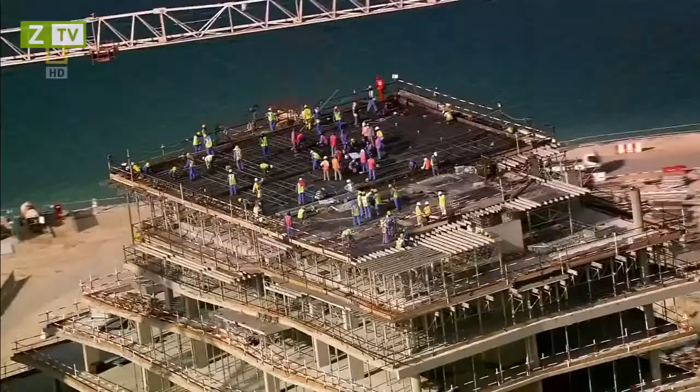Abu Dhabi, the richest city on the planet. It wants to join the City Super League and is undertaking an incredible transformation, building this extraordinary skyscraper, Aldar HQ. Nothing like it has ever been attempted. It'll be a race against the clock. Will this megastructure push even Abu Dhabi to the limit?

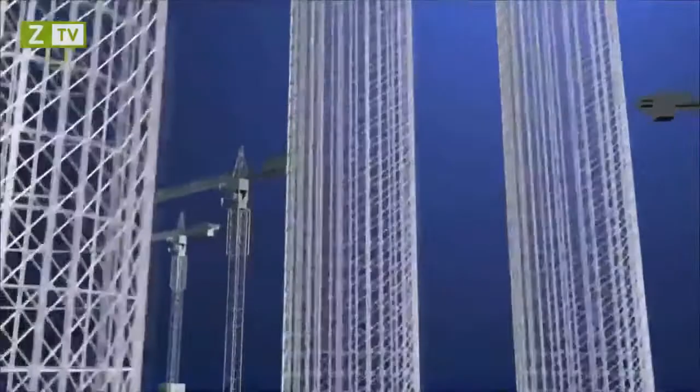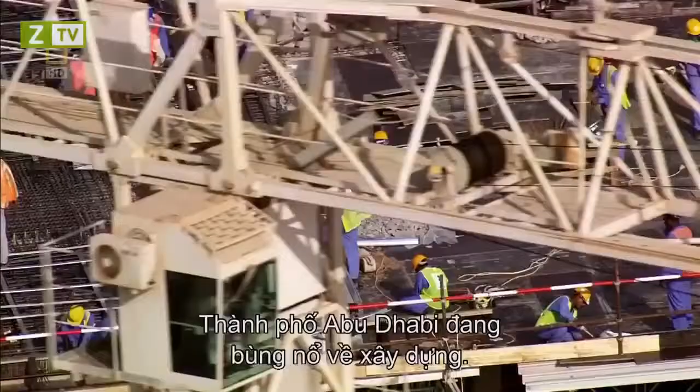Abu Dhabi is in the midst of a construction boom. It's the largest of 7 sheikhdoms known as the United Arab Emirates. Its capital, also called Abu Dhabi, is the richest city on earth. Its ruler, Sheikh Khalifa, has a cool $875 billion in the bank and an audacious spending strategy to match. He wants to transform the skyline and compete with the international elite of London, New York and Hong Kong.

But this is not the first time the Emirate has stood at the crossroads. Just decades ago, Abu Dhabi was a desert backwater, until the discovery of oil in 1958 brought unimaginable riches to its ruler, Sheikh Zayed. As the petrodollars flowed in, he converted the shell houses into high-rise, and the traditional way of life was swept away.

Today, Abu Dhabi is a thriving metropolis, sitting atop the world's 5th largest oil reserve. But black gold alone cannot put this city in the Super League. To do that, Sheikh Khalifa must lure big business and tourist dollars. Abu Dhabi must expand to thrive.

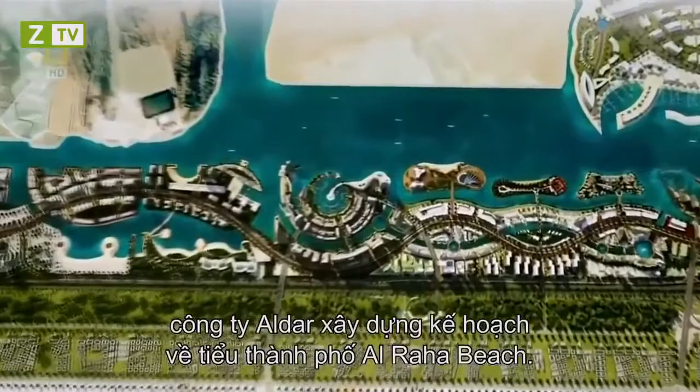To put Abu Dhabi on the world map, fledgling property developers Aldar plan a whole new micro-city, Al Raha Beach. It's an ambitious proposal. At 11 kilometers long and almost a kilometer wide, this city on the sea will be the biggest project ever attempted in Abu Dhabi's history. Mohammed Al Mubarak is in charge of delivering this audacious development. The vision of their highnesses and the vision of Aldar was to create this almost mini city where people can live, study, play, and work in one destination.

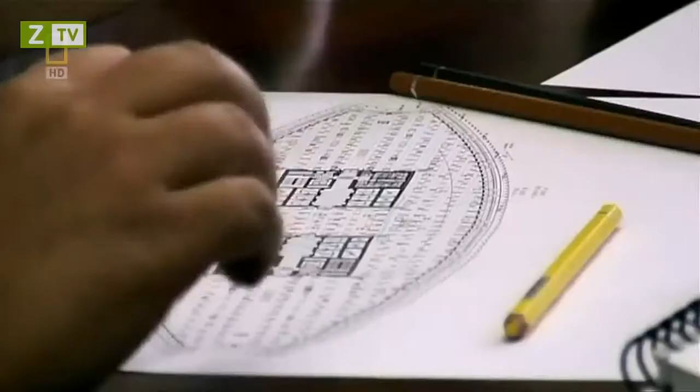Al Mubarak must attract investors if Al Raha Beach is to succeed. So to launch the project, he commissions a signature skyscraper. Creating an iconic structure on Al Raha Beach was of vast importance on basically putting Al Raha Beach on the world map. Al Mubarak sets Lebanese architect Marwan Zgheib the task of designing an icon that raises the stakes even higher. The building will become Aldar's headquarters in the heart of their colossal development.

But creating something new in a land where the iconic is the everyday won't be easy. Neighboring Emirate Dubai has taken center stage with a number of headline-hitting projects. The world's tallest skyscraper, Burj Khalifa, the Palm, and the World, and the emblematic Burj Al Arab. To stand out from the crowd, Zgheib knows he must redefine the extraordinary. Simple can be powerful sometimes, especially in architecture. You can see it since the pyramids of Egypt. Most of the iconic buildings are very simple buildings.

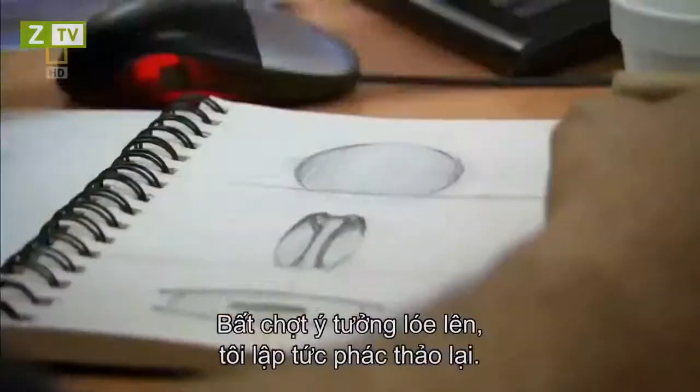But it isn't until Zgheib is relaxing on a plane that he has a brainwave. But I couldn't sleep, so it was a moment of relaxation, you know. And then the idea came, simply. So I took a pen and I drew it on a sketchbook. The design is simple but daring. A round skyscraper taller than the Statue of Liberty, with a curved glass skin covering the area of 4 football fields. To be honest with you, the moment I imagined it, I knew it was a winning concept. I knew it was something different.

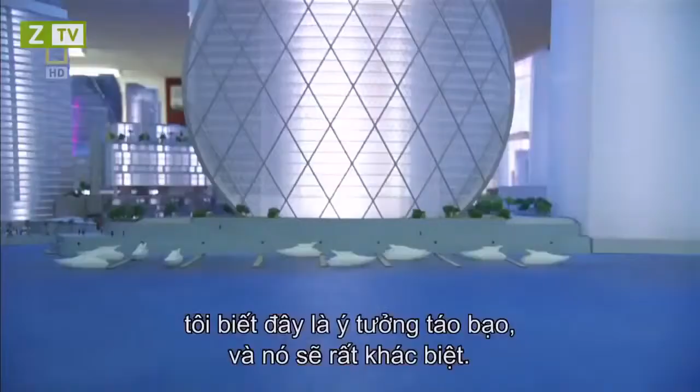In fact, the design is so unusual, Al Mubarak initially doesn't know how to react. And when I first looked at the MZ design, I was a bit confused in the beginning, to be honest with you. I felt like I was looking at a comic. I felt that this was a flying saucer and basically it landed on Al Raha Beach. And I just kept on staring at it for like another 15 minutes. And after 15 minutes, I just fell in love with it.

Zgheib's design is inspired by nature. 2 giant circular curved walls of glass mirror an open clamshell. Architecture is nothing but imitation of nature. At the beginning, the idea was so geometrical, very pure. It's like a seashell. The seashell has deep meaning for Abu Dhabi with its seafaring heritage. But a circular design poses a problem. Just like a coin that stands on its edge, it risks being unstable. The circle must be balanced.

So Zgheib turns to some very old school geometry. The real challenge of the circular facade was to find the 2 points where the building should pose on the ground. And for that, I had to go back to one of the oldest rules in architecture, proportion. When you have a circle, you can divide it into a pentagram.

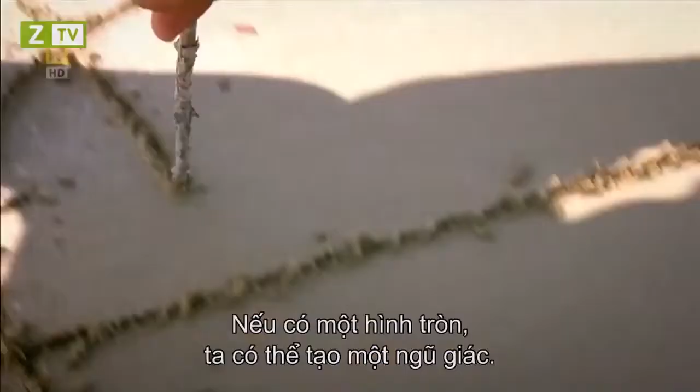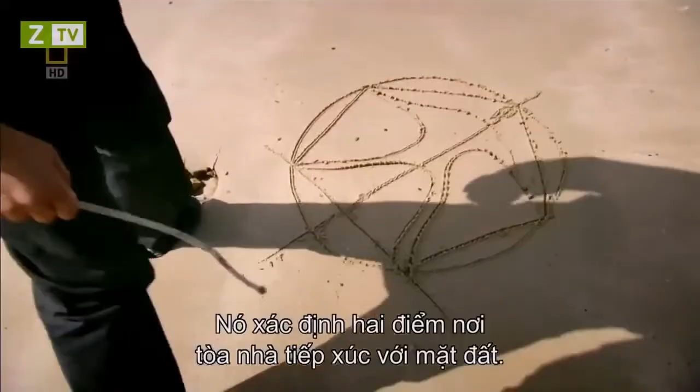And that pentagram, in fact, is a representation of the cosmic body of the human being. So you can put a man in that pentagram, the man and the universe. So the pentagram will define the two points of the circle where the facade will lay on the ground. And this will create the perfect balance.

It was the same thinking that led 16th century philosopher Heinrich Agrippa to draw man as a pentagram inside a circle, and has helped architects to proportion buildings for centuries. But it's one thing to sketch a circular skyscraper and another to bring it to life. There is no precedent. A building like this has never been attempted before. Zakhem must find out if his design can actually be built.

We knew from the first moment that the engineering of that building is not going to be a simple traditional thing. But it's not the skyscraper itself that poses the first major challenge. It's the proposed site. They wanted to show me the site, but all you can see was the sea, nothing but the waters. Unbelievably, the solid ground required for Aldar HQ does not yet exist. The desired location is 700 meters out in the Persian Gulf and 8 meters underwater.

New land must be created. Over 3 million cubic meters of sand must be found. Surely a simple task with Abu Dhabi's endless desert dunes. But desert sands are too fine to build with. The land would just slide into the sea. Marine sand is needed. Its larger grains help it stick together, creating the perfect base to build on.

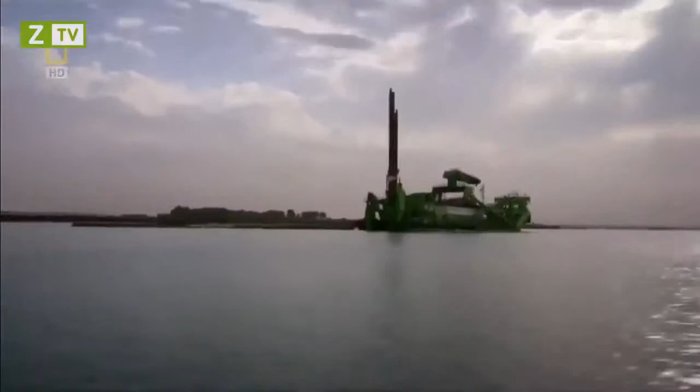Dredging sand from the seabed is one solution, but fortunately, the late sheikh has already done the job for them. Whilst cutting a shipping channel in the late 1970s, Sheikh Zayed created an island of discarded sand. Luckily for the engineers, it's just across the water, so they decide to move all 20 million cubic meters of it. A fleet of cutter dredgers eat their way into the island.

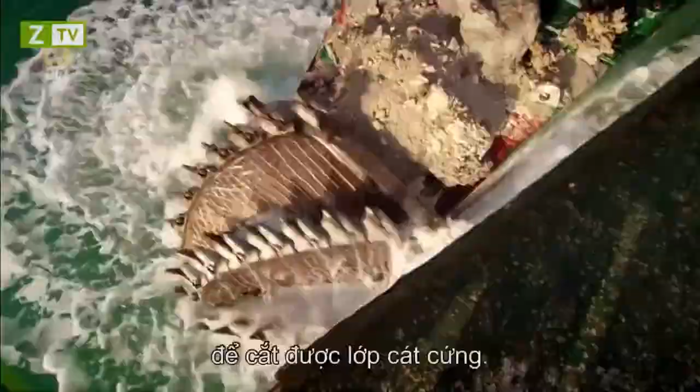These are no ordinary dredgers. It takes an enormous claw layered with 48 reinforced steel teeth to slice through the hardened sand. The sand is pumped through a floating pipe to the construction site. Here, excavators toil 24 hours a day to flatten the virgin ground. After 8 months, the land for Aldar HQ is fully formed, and with this, the first major problem overcome.

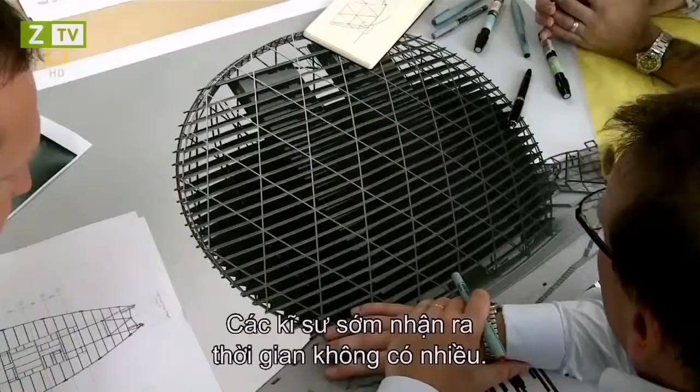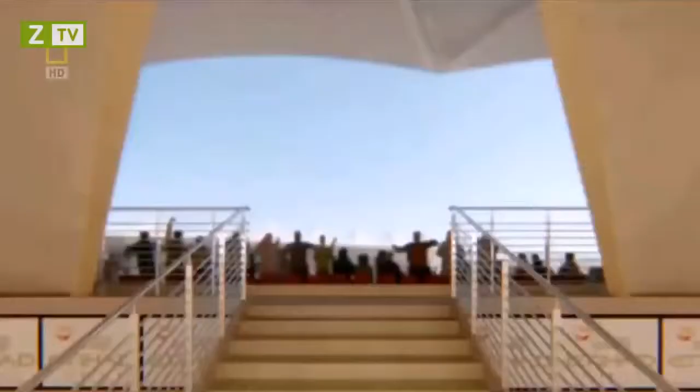Aldar want their skyscraper completed by an astonishing deadline. In just 30 months' time, the eyes of the world will be on Abu Dhabi when it hosts its first Formula One Grand Prix. The racetrack will be on its own designated island, complete with hotels and theme parks. And Aldar are building the lot. The international press and tens of thousands of visitors will descend on the city. It's the ideal opportunity for Aldar to showcase their new HQ. But to stand any chance of meeting this target, the team will have to pull out all the stops.

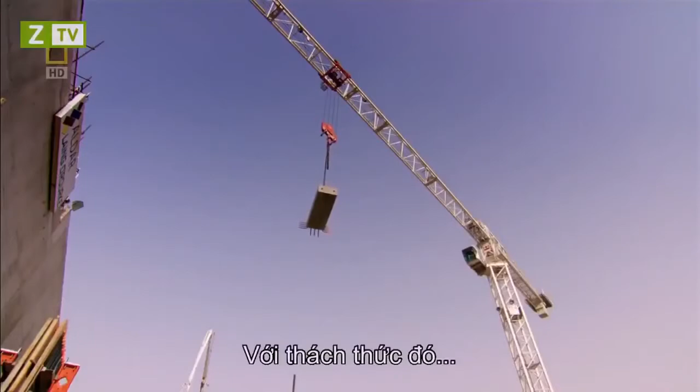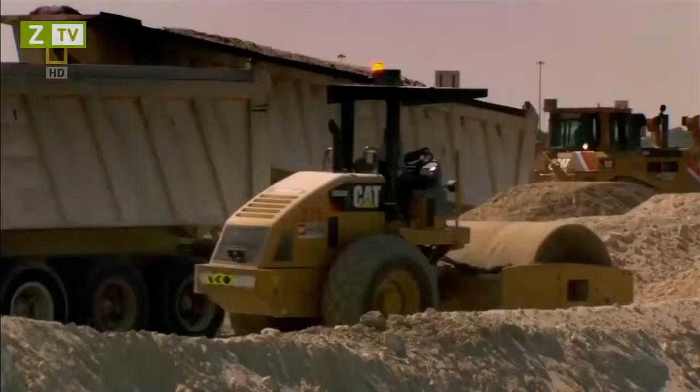Normally, blueprints are complete before construction begins. But Aldar HQ's deadline means this is impossible. Given the programme challenges with this project, the only solution was to overlap the design with the construction. It's the only way the team can design and build a radical skyscraper in just 30 months. The clock ticking, the ground is prepared for the foundations. They will carry the loads of Aldar HQ into the ground.

But there's a problem. Working on blueprints one step ahead of construction could be risky. The speed at which the construction had to be undertaken meant we had to get the foundations in before we'd fully resolved what goes on above. Even though nothing like Aldar HQ has been built before, the engineers must take a leap of faith and start laying the foundations without a full set of plans. It put tremendous pressure on the team. Problems can't remain problems for long. We don't have the luxury of time to sit around and contemplate what the solutions might be.

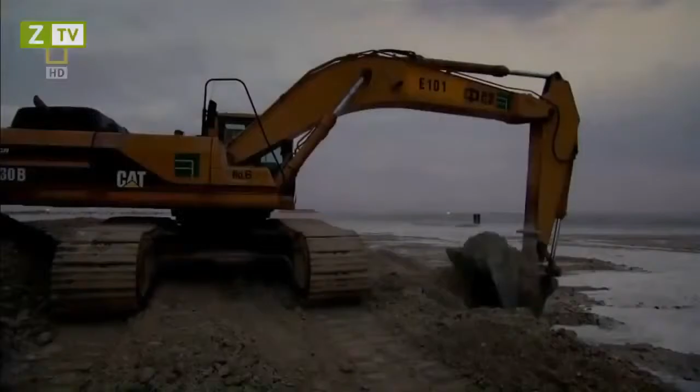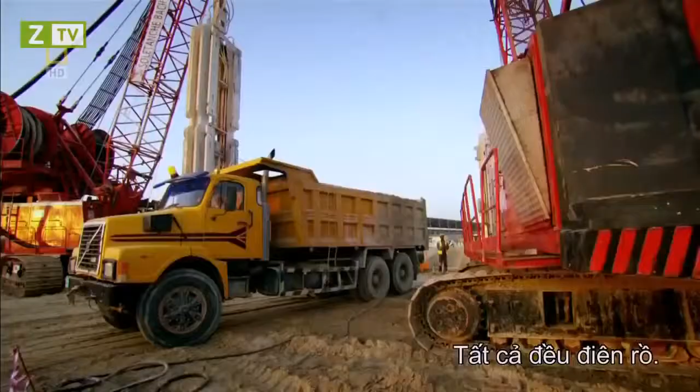Just 1 month after design has started on Abu Dhabi's round skyscraper, the construction team arrive on site to begin foundation works. For construction manager Miles O'Sullivan, the schedule is a shock. With the design not complete and being told you're going to pile in 1 month, almost crazy. But it's not just the first deadline O'Sullivan has to worry about. Aldar HQ's round curved shape presents an enormous sail-like area when wind strikes. Wind tunnel tests must be done to prove the foundations can take the strain. But the results won't be back until work has already started.

Abu Dhabi is regularly hit by high-pressure winds that sweep in from the Persian Gulf. But building Aldar HQ so close to the sea will put the foundations under another kind of pressure. Digging for Aldar HQ is very similar to digging here in the sand. What you get as you dig down is you'll get to see the groundwater starting to surge through the sand. And in fact, it's that groundwater coming through the sand here that's creating the pressure and obviously creating the issues for us when we do the construction.

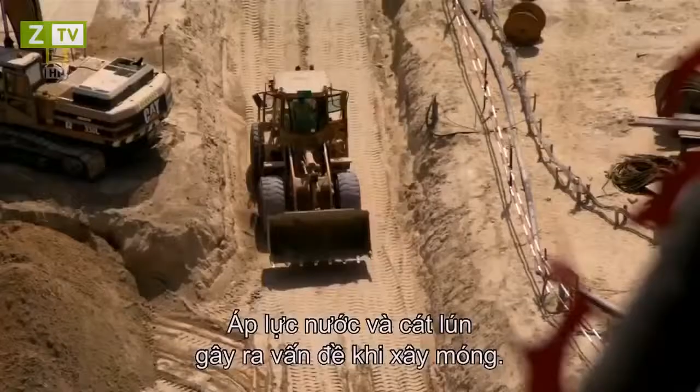The upward pressure of the water and the loose sand pose a problem for foundation construction. Before excavation can begin, the team must build a solid barrier called a diaphragm wall or D-wall. It's a concrete barricade formed of interlocking panels which socket into the bedrock and reach 16 meters below the surface. The D-wall holds back the loose sand and the surging seawater, ensuring the ground inside the barrier can be removed.

These areas here, what are these? The D-wall must be built before the foundations can be laid. But with the blueprint above ground a work in progress, the team can only hope that over-engineering the foundations will make them strong enough.

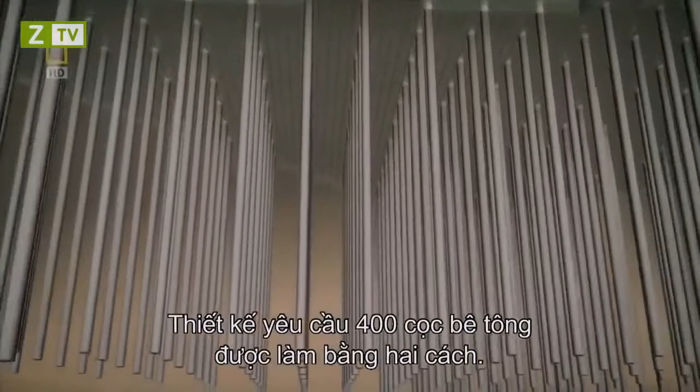The design calls for about 400 concrete piles that work in two ways. Half of the piles rely on friction with the ground to secure the structure to the rock and sand below, whilst the remaining piles drive deeper into the rock to dissipate the building's immense loads into the ground. On site, D-wall construction begins. It's the same process ongoing at this Abu Dhabi construction site.

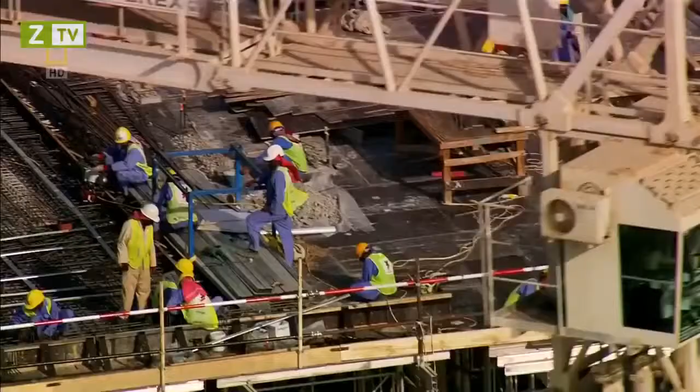Until recently, Al Raha Beach was just a vision for Aldar's Mohammed Al Mubarak. But the dream is slowly emerging from the sea. Seeing that land come up, seeing the amount of work and the amount of staff we had on the ground to make sure that was going to be done, that was like watching Rome being built.

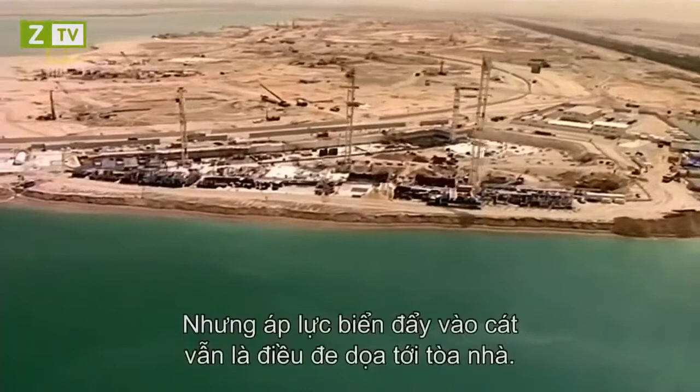The D-wall and concrete piles create a firm foundation upon which to build Aldar HQ. But the force of the sea pushing up through the sand still poses a threat to the skyscraper. A great way of demonstrating the problems we faced at Aldar HQ with the groundwater is in imagining that this bottle here is Aldar HQ. And as I push the bottle down, you see forces are exerted on my hand. And in fact, that's the groundwater trying to push the building out, trying to push Aldar HQ out of the building site.

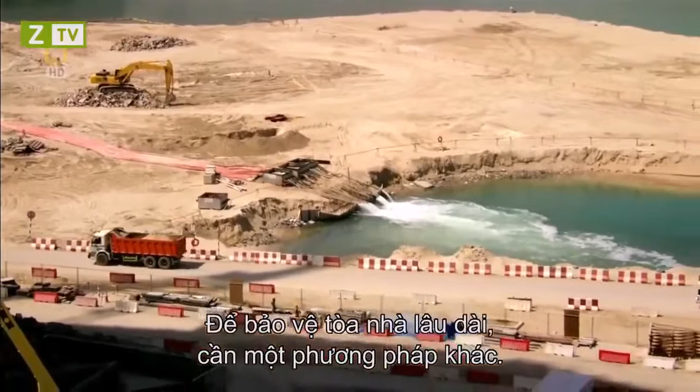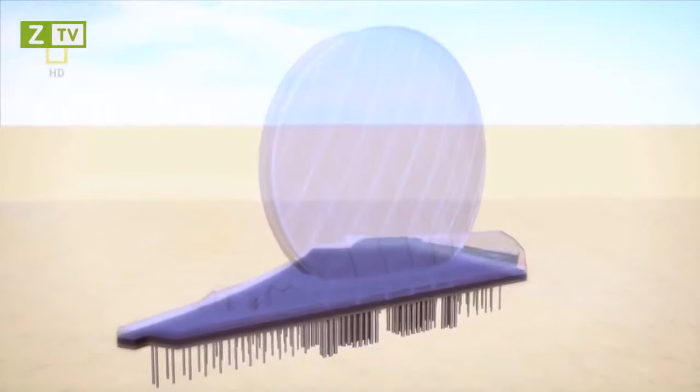To keep the site dry during construction, water is sucked out of the sand and pumped out to sea. But that's only a short-term solution. To protect this skyscraper in the long term, the team need an extra defense. It's a giant slab of concrete called a raft. It creates a barrier against surging water, stops the piles from punching up through the building, and acts like a snowshoe to evenly distribute Aldar HQ's 59,000-ton weight into the ground.

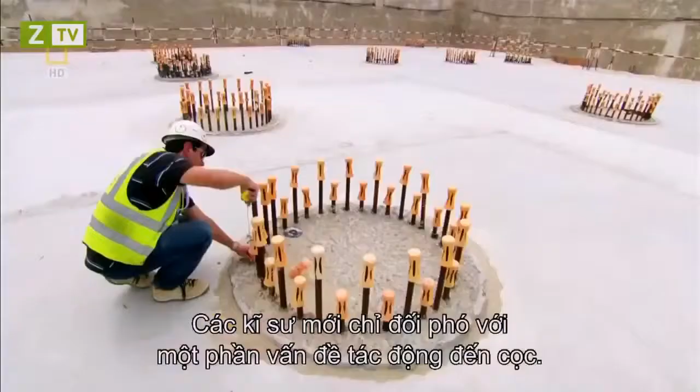The raft construction for Aldar HQ is 12,000 cubic metres of concrete, which is a 30,000-ton structure. It's a huge element. With 2,000 truckloads of concrete to pour, it's a job that continues into the night. But engineers are just getting to grips with the severe forces that will affect the piles. The unique shape of the skyscraper will capture wind like the sail of a yacht. There are no guarantees the foundations will be strong enough to cope with the loads.

The advanced construction works had to commence so quickly that we didn't have time to do the wind tunnel test. It was important that we did one, primarily because this is a unique shaped building. Gibbons calls upon wind engineer Roy Denoon in Colorado, USA. He puts a scale model of the HQ through its paces in his high-tech wind tunnel.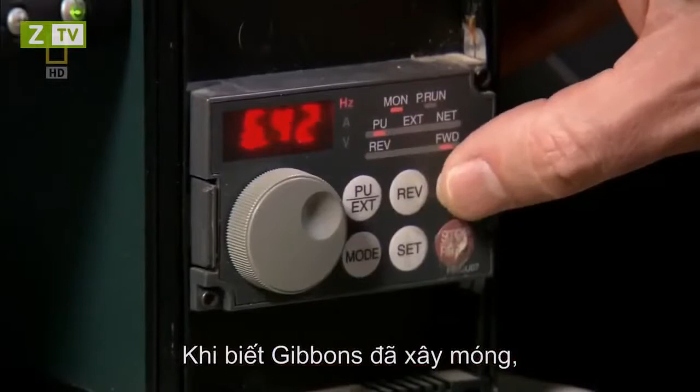Right at the start, Craig Gibbons actually called me and said, "We've got something really unusual coming up. Can you take a look at it and give us your first best guess of what the wind loads might be? Give us some guidance on how to get to some loads for the foundations, because this is running on such a fast-track schedule." Knowing that Gibbons is already building the foundations, Danoon wastes no time in firing up the fans. If the tests reveal the wind loads are higher than predicted, the foundations already in the ground may have to be redesigned. To be putting in the foundations before we could finish the wind tunnel testing, that always gives us a little bit of cause for concern.

Danoon is right to be worried. He knows how high-altitude wind impacts on very tall rectangular skyscrapers. But Aldar HQ's lower height means another type of wind is the threat. When we look at the really extreme wind speeds in the Middle East and in this region, we find that the highest, what we call gust wind speeds, the short events, are caused by thunderstorms. Abu Dhabi may appear sun-soaked, but during the spring, the intense sun heats the moist air, causing spectacular thunderstorms. Wind speeds can escalate up to 137 kilometers per hour. The key issue with thunderstorms in this region is that they give the absolute highest gust wind speeds.

Now, for the very, very tall buildings, that's not too critical because they occur down low. For Aldar HQ, they were really critical. Thunderstorm winds are strongest between 50 and 150 meters above ground. Aldar HQ is right in the danger zone.

In advance of getting the wind tunnel tests, we'd speak a lot with the wind tunnel engineer, Roy Denoon, and Roy would wind me up about the kind of loads he was getting, etc. And knowing that the piles were going in as we spoke. Wind hitting Aldar HQ's sail-shaped facade puts the building's narrow base under pressure. The wind wants to twist the structure. The foundations must be strong enough to resist these forces.

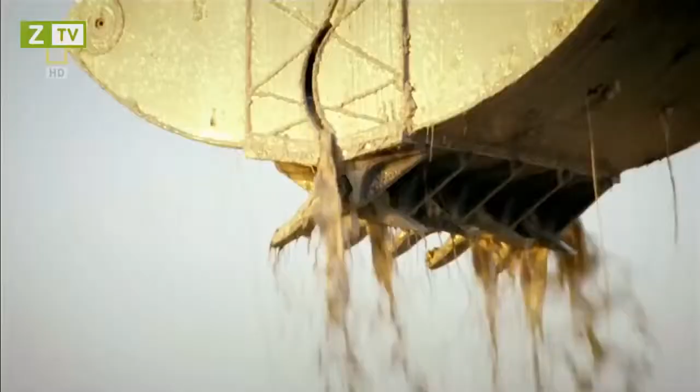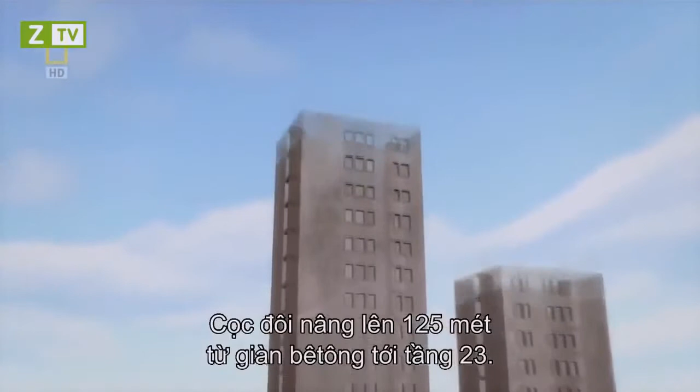Now the structure needs a super strong backbone or core. But again, conventional building won't fly with this design. For Aldar HQ, one core wasn't enough. We needed two cores, in fact, to take all the loads down into the structure. Aldar HQ needs two concrete cores for extra stability. The twin spines rise a full 125 meters from the concrete slab to level 23. Reinforced with 6,500 tons of steel, these cores will transfer the loads into the piles.

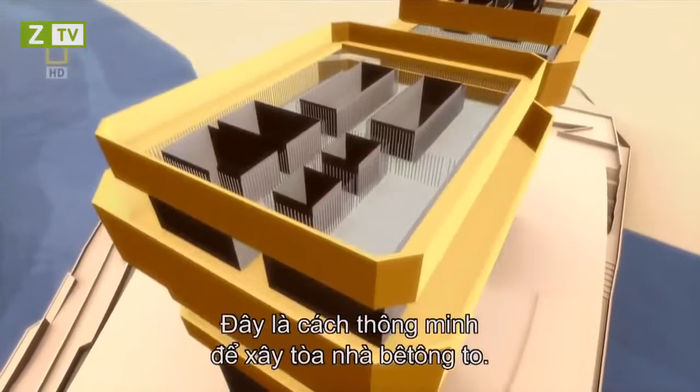But to channel these forces safely, the concrete must be cast without any flaws. They need a way to build the cores as two single pieces of concrete. The answer? To slip form. It's a clever way to build big concrete towers. Liquid concrete is poured into a giant mold, which forms the shape of the structure. The mold slowly climbs up the core as it's cast, forming a single concrete tower without any joins.

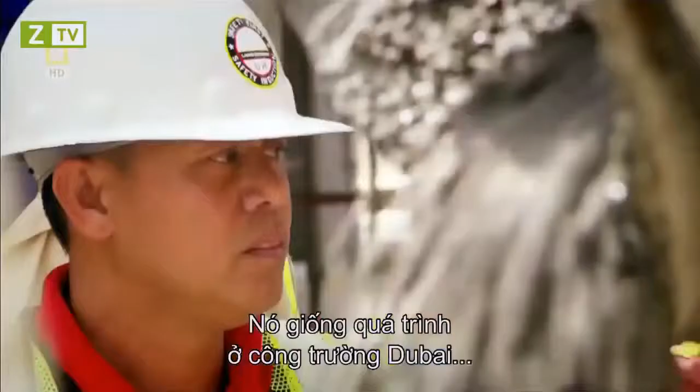Seamless concrete will ensure the HQ's cores are strong. But these 125-meter backbones must be built in only 6 months. It's the same process ongoing at this Dubai construction site, led by the Aldar HQ team. We are calculating how much per hour we need to climb, and then how much concrete we need to place in every hour. Slip form is fast, but on this schedule it's not fast enough. O'Sullivan has a trick up his sleeve to speed up construction. We set a challenge to both cores, who could get up there first. More, get up.

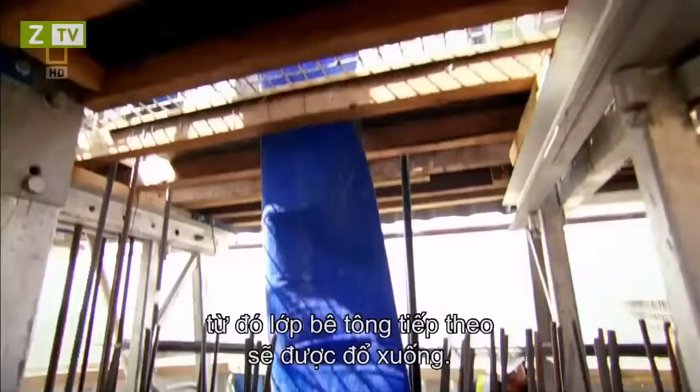The teams battle to reach each level before the other. The cores grow meter by meter under a constant cycle. The concrete is released and poured around the steel reinforcement. Hydraulics anchored to the structure raise the mold or shutter so that the next layer of concrete can be poured. And manpower is a key focus because slip forms are very labour intensive. You need to make sure that the guys are on deck, they're there at the right time, they're doing the right works.

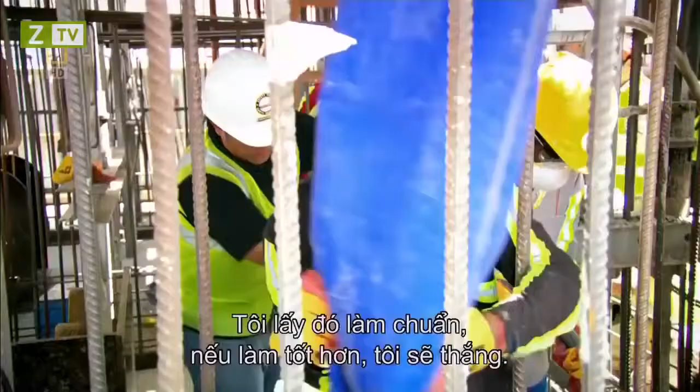4 months into core construction, the two teams are neck and neck in the race to the top. Core 1's team leader keeps a close eye on Core 2's height. It's been my benchmark, so if I'm doing better, I'll be ahead of them. So a lot of pressures are there. My boss is telling me, do this, go up, go up, go up. But it's good, the pressure is good. Core 2's leader also feels the strain. I'm working 24 hours today. I try to finish earlier than the other core.

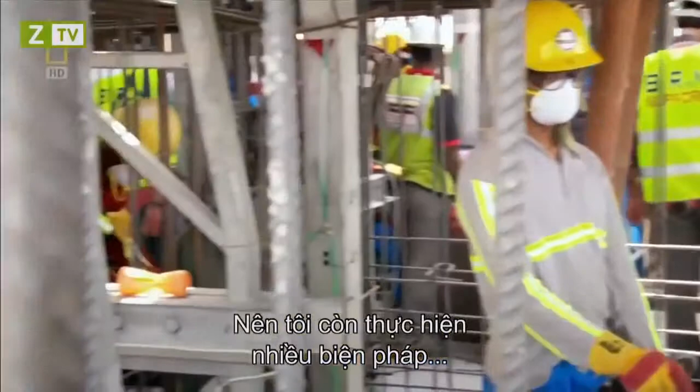Every month, the builders pour enough concrete to fill 1.5 Olympic swimming pools. But the teams aren't home and dry yet. It's still a challenge to finish. Cores are renowned for going up quickly and sometimes having problems, so there's a lot of coordination effort that goes in to make sure that they do go up on time. We had structural steel elements to cast in. We had crane connections to get right.

After just 6 months, the 2 cores are approaching the top. Core 2 is only a metre or so behind, but Core 1 push ahead to victory. Core 1 won the race. It's really good to know that we're on top. For O'Sullivan, the contest to build the cores in record time has paid off. A lot of planning goes into the cores. To see it come off, a fantastic feeling. But it's only a stepping stone, the core construction. There's a lot more to go on.

The team have so far overcome the obstacles to bring Aldar HQ to life. But now they must face their most complex challenge to date. 1 year in, and Abu Dhabi's radical skyscraper is beginning to take shape. But with only 19 months to the deadline, the engineers must crack how to build Aldar HQ's vast external shell.

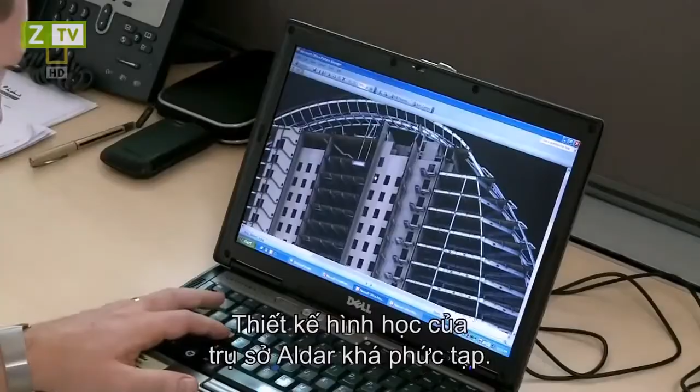The design demands a heavyweight shell to support its wide girth and survive huge wind loads. But the architect stipulates open office space, floor-to-ceiling windows, and panoramic views of the Persian Gulf. In the United Arab Emirates, the shells of rectangular skyscrapers are built with concrete. But the geometry of Aldar HQ's shell is so complex, it must be built with the precision of a Swiss watch to fit together. On this scale, achieving millimetre accuracy with concrete is practically impossible.

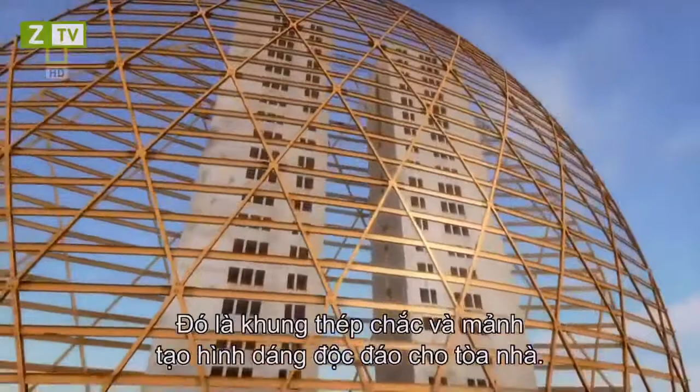The steel exoskeleton should make the architect's vision possible, but it'll be a first for the United Arab Emirates. Constructing a skyscraper like this will be a step into the unknown. The geometry of the building presented a significant challenge to us, but the other challenge was that a diagrid building, or buildings using this diagrid system, had never been built before in Abu Dhabi and the UAE. Let's have a look at it if you don't mind.

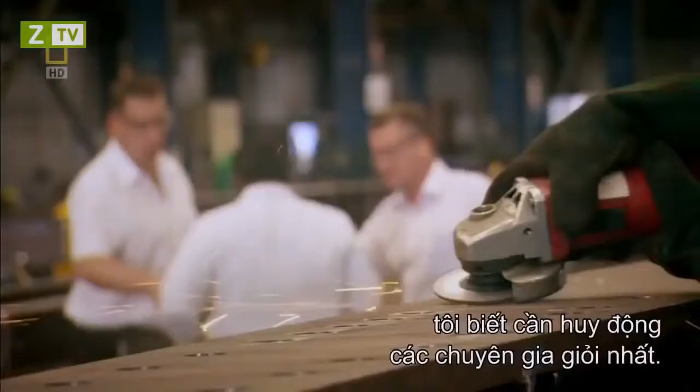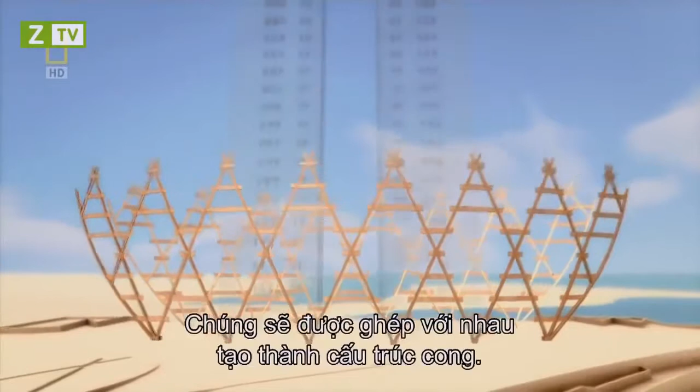It'll take expert steel fabricators to pull this job off. When we first saw the design, it was something that we knew we had to put our most experienced guys on. The structure's very, very complex. The army of fabricators work in shifts around the clock to cut and weld 2,500 tons of steel. The factory is building a series of A-shaped steel sections, weighing up to 30 tons each. They will connect together to form the structure's signature curves. But if manufacturing these giant A-frames is not a big enough job, lifting them into position on site will be a major challenge.

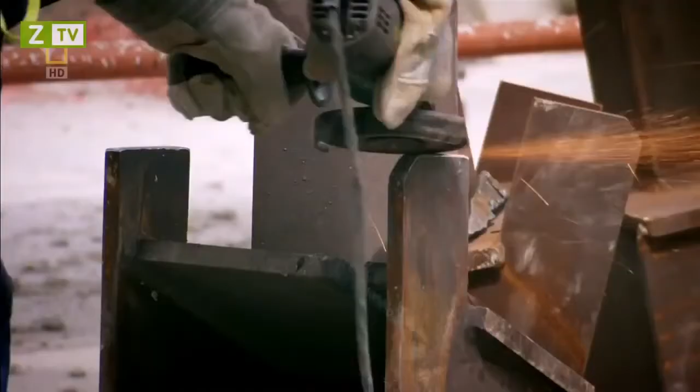Great to see the steel arrive for the main diagrids, the main columns to the structure. Huge sections. The thought of actually starting the steelwork some 18 months after we started the job, fantastic. But excitement of the first A-frame delivery is soon replaced with trepidation. Lifting these monsters will be a precision job, and tensions run high. When we rigged the first A-frame up, you've got to put all the chains on it. It would take maybe an hour to rig it up, and everybody's then thinking, I hope this is going to work. Everyone is on tenterhooks.

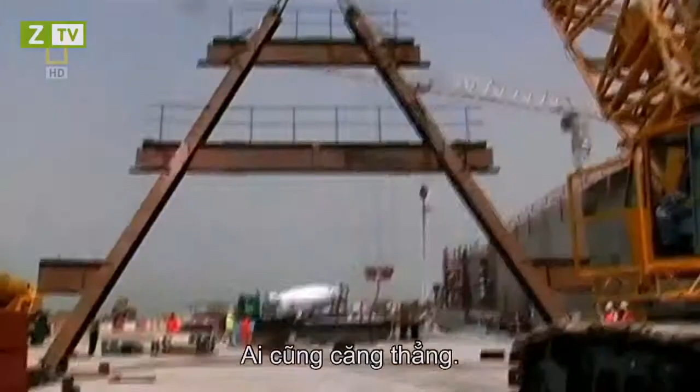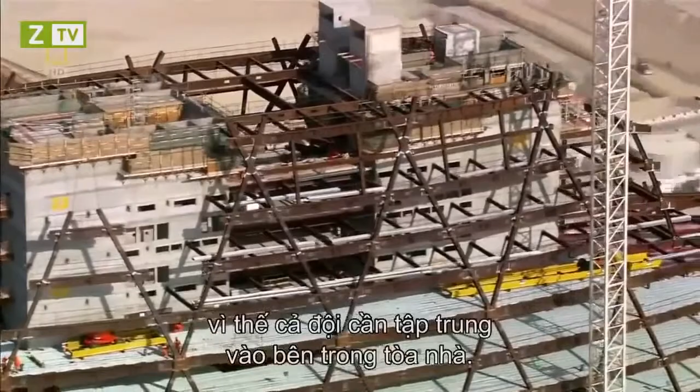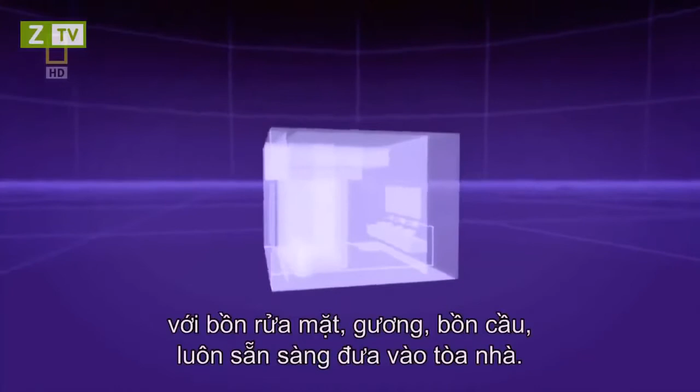So the team must now focus on the HQ's interior. The structure needs an alarming number of restrooms, 85 in total. This is no weekend DIY job. It'd take an army of plumbers and time the schedule cannot spare. So to fast-track the task, the team innovate again with prefabricated washroom modules or pods. A pod is a factory-made restroom, complete with lavatories, basins and mirrors, ready to plug into the building. The team plan to lift these 12-ton pods by crane and lower them into the cores like a giant game of Tetris.

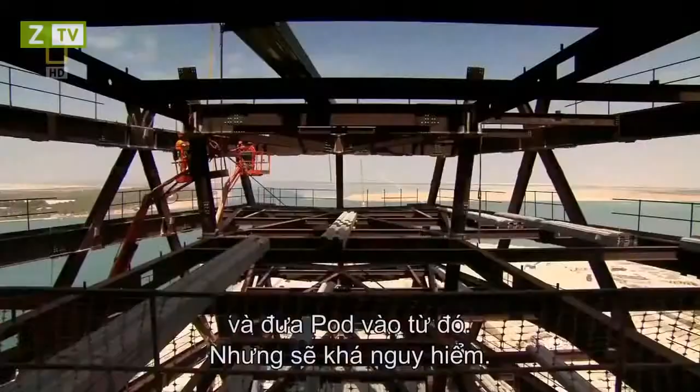Construction is a finely tuned sequence. The pods have to be in before the exoskeleton blocks access to the cores. Aldar must approve the design fast, but there's a problem. We produced a lot of visuals and graphics which we had signed off. Then we actually built the pod. We went to look at it at the factory and a lot of people thought that's it. But Aldar unexpectedly rejects the pod design. It's just too ordinary for such a futuristic skyscraper. It will take months to remodel, and the exoskeleton can't wait. The whole plan could go down the pan. The only option is to leave out 2 roof sections and drop in the pods later, but this has its own dangers.

With zero hour looming, the team must now wrap the building's skeleton with a glass skin. And no one has ever built a glass facade like it. The geometry of Aldar HQ is highly complex. Two giant bowed facades cover an area the size of 52 basketball courts. A third narrow surface joins the round facades like a zipper, arcing an extreme 290 degrees from one side to the other.

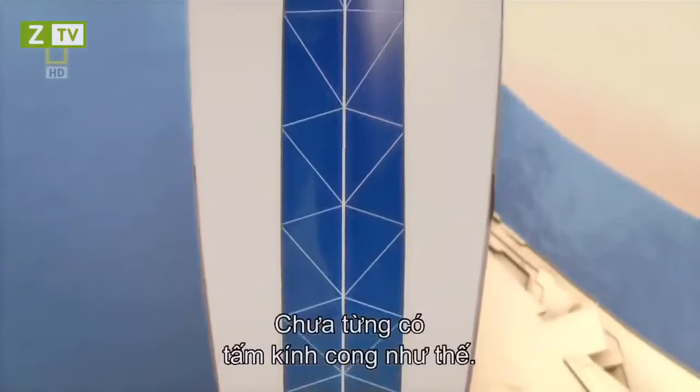But curved glass like this doesn't exist. The engineers need another plan. The secret to covering a curved surface with flat glass is its shape. Square glass isn't an option. Squares can only bend in one direction at a time without distorting. Aldar HQ needs triangles. They can pivot on 3 axes and seamlessly join with their neighbors. To form these complex curves, it'll take 25,000 individual panes.

But before glass production can begin, the team must know what wind pressures it will face. It's back to wind engineer Roy Denoon, who must test the design in his wind tunnel. When we first saw the design, we knew there was some potential for some quite high glass design pressures. If you under design a pane of glass, then it will be sucked out of the building. The large facades are most likely to cause trouble.

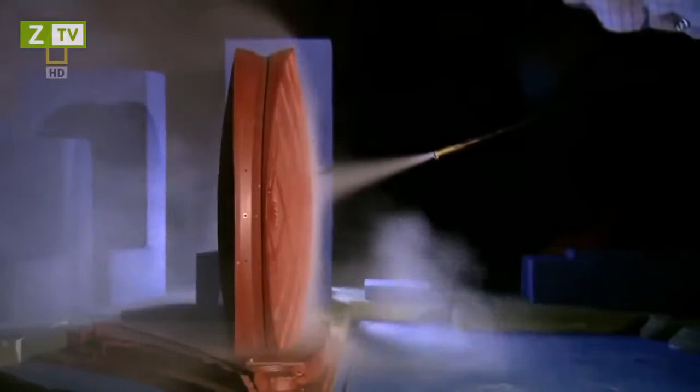The biggest loads on the overall building are when the wind's coming flat into the wide face, so it's capturing it almost like a sail. The wind comes into the centre and spreads out around the building, and where it separates and splits away from the building around the edges, that's where we see the largest pressures. The pressure is like a big SUV hanging off the outside of each panel.

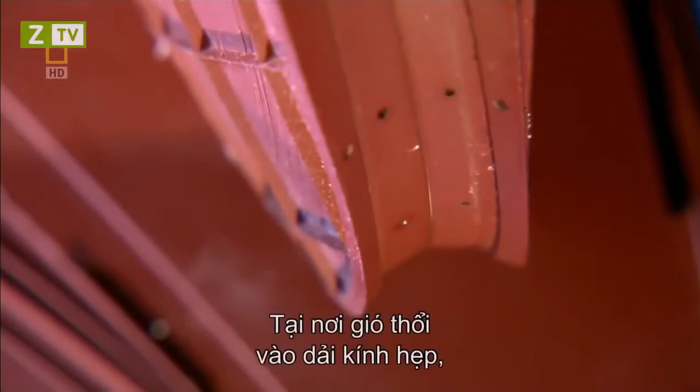But that's not all Denoon's test reveals. The circular shape of Aldar HQ creates another problem. When we initially saw the design, the sharp edges threw up the warning flag that said, look, we can get some pretty large pressures here. Where the wind hits the edge of the narrow strip of glass, it spirals in on itself, creating a vortex.

You see this recirculation of the flow. It separates away and you get this little bubble on the surface where the wind isn't hitting, and then it comes back in to meet the surface again. That's typically an indication that that's where your highest design loads are occurring for your glass. And that very, very strong suction force is what that little bubble means. To stop wind sucking glass out of the HQ, each pane must be beefed up with thicker glass and a stronger frame.

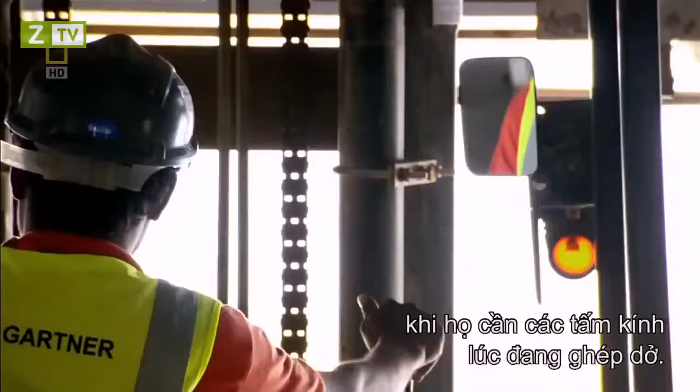But that does nothing to limit the scale of the job ahead. Installation. You talk about 25,000 pieces of glass. To do that for the building in 10 months, it's a monumental effort. It's a constant battle, making sure that you get the glass to site. But having the glass factory on site is a lifesaver. It made it easier for the site to actually call up on glass. Once they were installing the panels and ran out of glass, we're immediately on the phone, hey, we need more panels over there. So we got them on a truck, and 5–10 minutes later they were on the site.

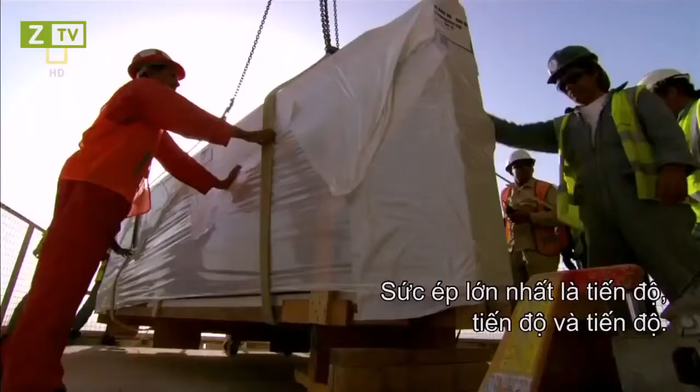The glass factory sends the panels to the site by truck, and the panels are lifted by crane up to the installation team. The constant pressure was the program. The glass is pulled onto the floor plate, but it takes a team of 8 specialist riggers to install the panels. Probably the hardest thing was the sheer volume that had to be installed. Fixing glass on a curve at this height means the panels have to be swung out from a platform that hangs out of the building.

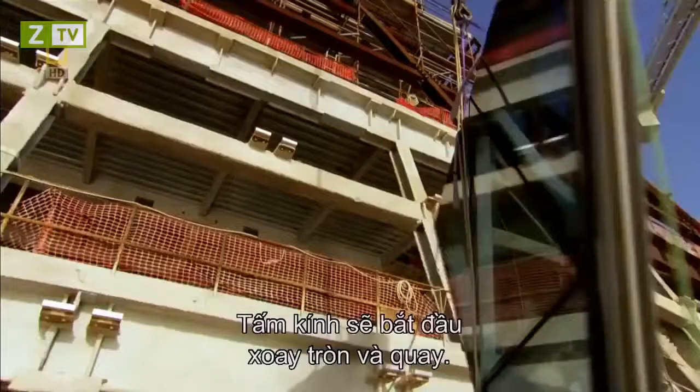It should be easy, but then this team have Abu Dhabi's wind to contend with. The wind here can just blow in from nowhere. It caused us no end of problems. The glass would start to revolve and spin. We would get a choice whether to lift it, bring it into the building, put it down, or to put it straight back down on the ground. They were decisions that had to be made on the spot. And you don't want a large panel coming down from 20 stories. Just contemplating that, it doesn't bear thinking about.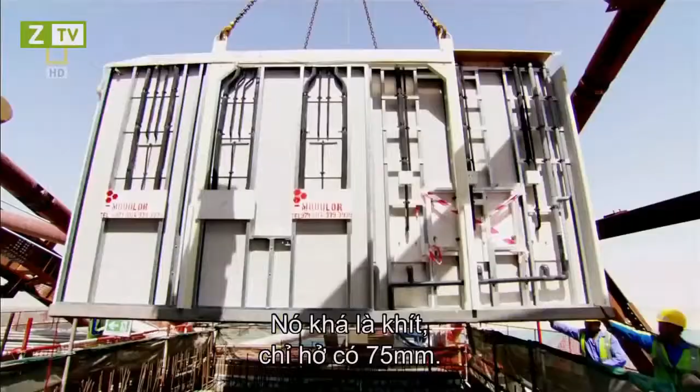The pod drops are quite quick. We hook them up, we take them up the 140 metres to the top of the tower crane. The pod can now be lowered into the core shaft. It's a tight fit with just 75 millimetres of clearance.

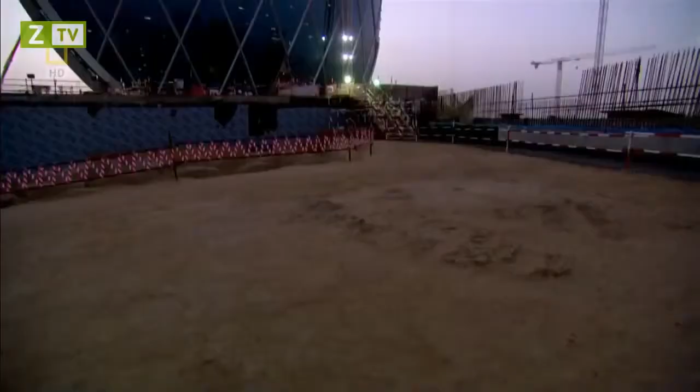When I saw the first pods in, it was a relief that that saga was over and we'd actually managed to achieve what the client wants. The pods are on the move, but the long delay has serious consequences. Finishing the exoskeleton should be a straightforward task. But the incomplete steel roof has sagged out of shape.

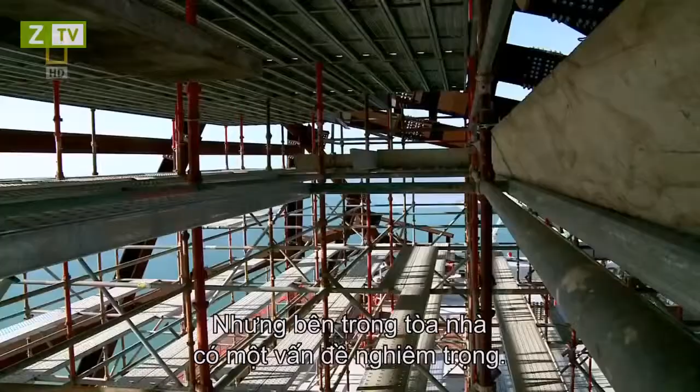Eight months from the deadline, and the world's first spherical skyscraper is fast approaching completion. But with the end in sight, construction hits a serious snag. The delay in fitting the washrooms into the cores has forced the team to leave the roof arch open, causing the steel to slouch out of shape.

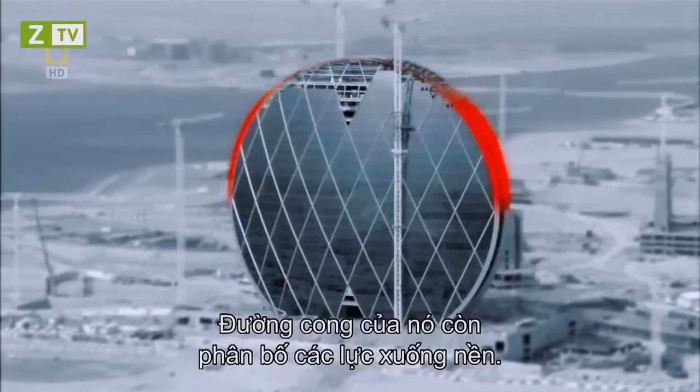The arch of the HQ's lightweight roof is the key to its strength. Its curves evenly distribute the forces down into the foundations. But if any elements of the arch are missing, the forces cannot flow away. The roof will sag under the weight.

To discover how serious the slump is, the steel is surveyed. I made a phone call to our site supervisor, Bob, and asked the question of what the actual sag was recorded, expecting it to be around about 50-60 mil. When we got the figures of 150 millimetres, I was a little bit shocked.

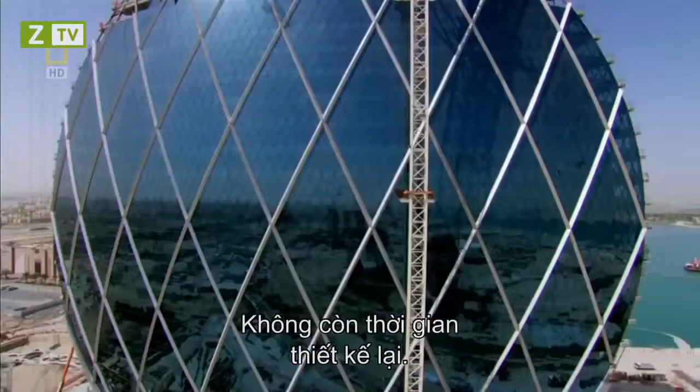With a building that relies on precision engineering, 150 millimetre sag is a huge problem. The roof will not slot together. The brackets to connect the remaining 40 glass panels will be out of alignment. There is no time to redesign. The team have to somehow make the roof steel fit together.

The only way is to lift the entire roof into position, and it weighs a staggering 200 tons. Even for experienced steel engineer Bob McPhee, this is a serious undertaking. I hate it when you start waking up thinking about your work. I've never liked to do that.

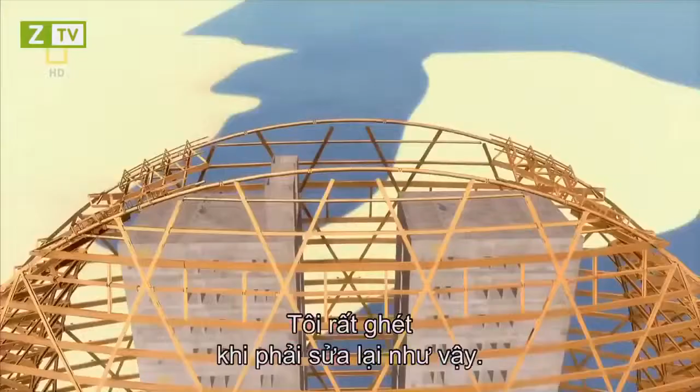To lift the roof arch, 2 hydraulic jacks are positioned on top of a load-bearing wall, carrying 80 tons of weight into the core. 2 more jacks are propped with 16-metre-tall steel columns and channel 40 tons each into the concrete floor of level 23. The props are packed with steel slabs to hold the roof in position as the jacks are raised.

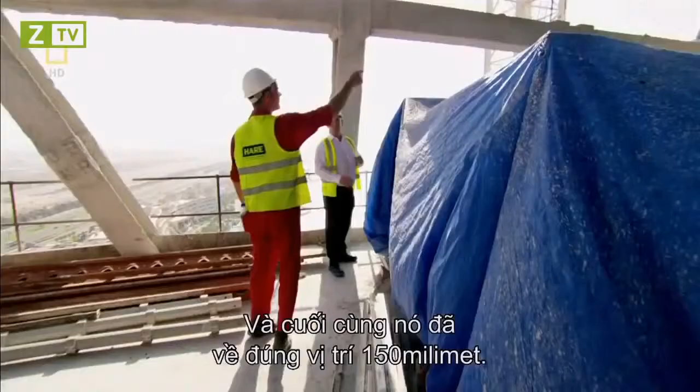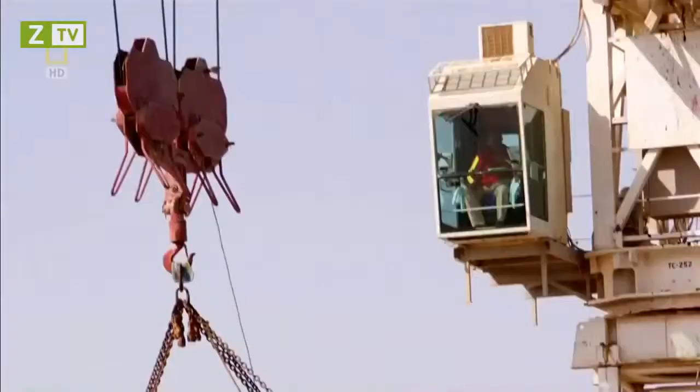The roof was moving firstly a couple of millimetres, then 5, then 10, then gradually into its position 20, 50, 100, and then into its final position 150 millimetres. The entire roof is raised by a whopping 150 millimetres. The slumped arch is finally in the right position. All that remains is to lift the last steel section. It's a tight fit. With a millimetre to spare, the roof is finally complete.

With just weeks to spare before Abu Dhabi's first Formula One motor racing spectacle hits town, all of Aldar HQ's 25,000 glass triangles are in position, except one. The glass installation team lower the pane inch by inch. No one wants to be responsible for shattering the last sheet of glass. It's a defining moment for the team. Finally, the last pane slots into place.

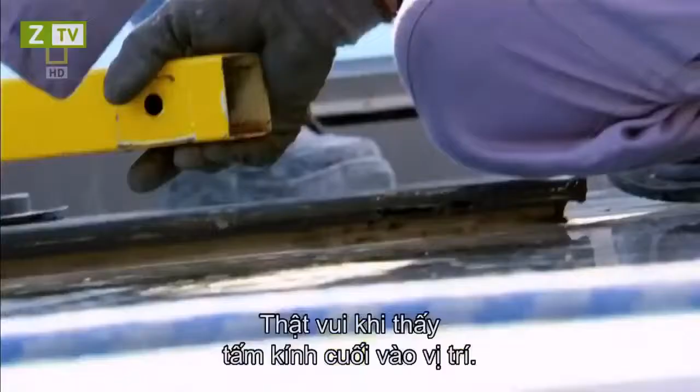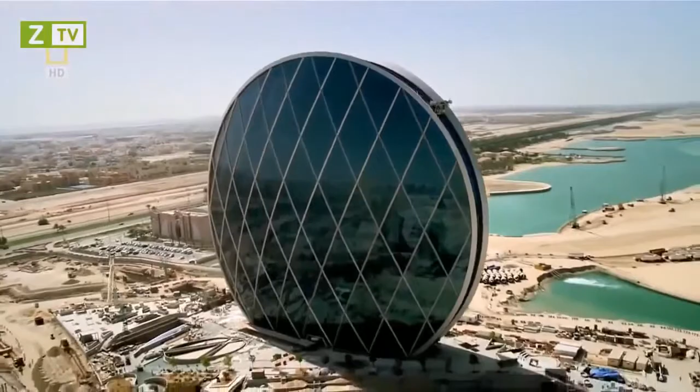Ecstatic. Actually see the last bit of glass go in. Amazing feeling. Hopefully the guys here feel the same way, and I'm just overjoyed. Against all the odds, and in just 30 months, the team have fulfilled their brief. An engineering triumph. This is Aldar HQ. This circular skyscraper, a world first, rises 110 meters above the Abu Dhabi sands. All 3,000 glass panels mirror the surrounding landscape, reflecting the blue skies and the rolling sea of the Persian Gulf.

Amazing structure. You don't see any circles in the world being constructed, so to be part of that was fantastic. Mindful of all the issues and challenges and highs and lows in between adds to that feeling of triumph. Mohammed Al-Mubarak fell in love with an extraordinary idea. But will the building match his high expectations?

It's really a work of art. It's a stunning building. To me, it feels like it should be in a museum. The space is unbelievable. It's really a colossal building. When you come up front to it, it's even bigger than you even imagined. And for it to come from paper to that, it's great.

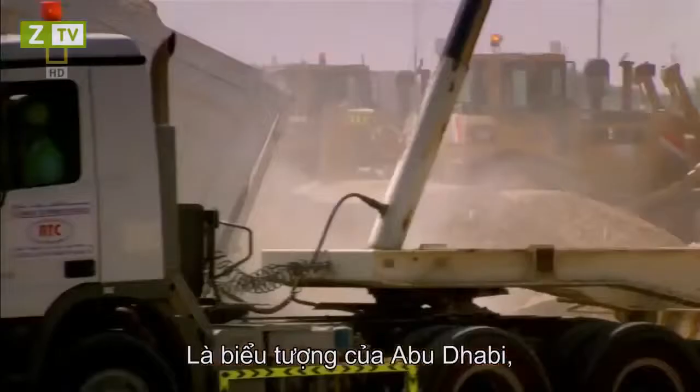Already an icon on the Abu Dhabi skyline, Aldar HQ should lay solid foundations for the future of Al Raha Beach. Architect Marwan Zgheib is delighted to see his concept sketch come to life. The building is more beautiful than the original idea because it's real now. It's no longer a simple concept.

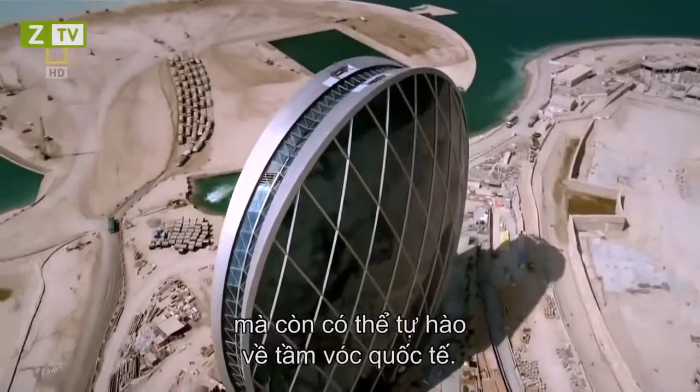It's become reality. Aldar HQ is a structure that rivals not just Dubai's iconic buildings, but can stand proud on the international stage. The HQ building has really put Abu Dhabi on the world map. If you ask me today, we're not yet into the world of Singapore or New York or Paris or London. Will we get there? I absolutely believe we will.